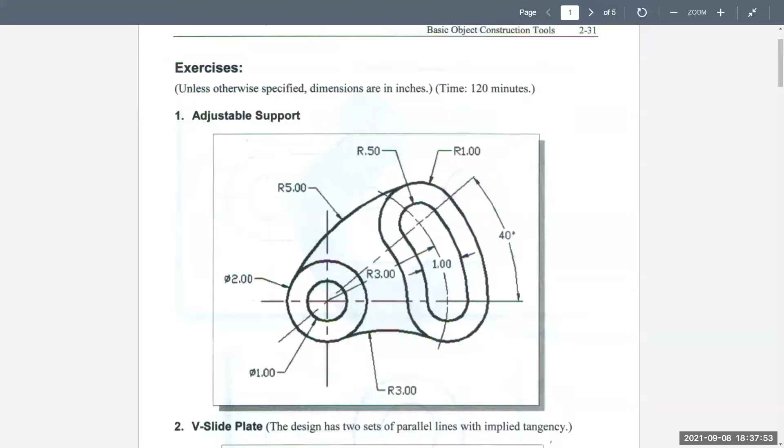All right, so I'm going to go ahead and do the adjustable support. And so the first thing I want to do when I look at this is notice that it says dimensions are in inches unless otherwise specified. So I can see here that everything is in inches.

And so whenever I start, I always try to figure out where is my 0, 0 going to be, right? So I notice that everything is based off of this point right here, this circle. For example, there's a radius here that's one, and so everything is off that. So I think the best thing to do then is to start here.

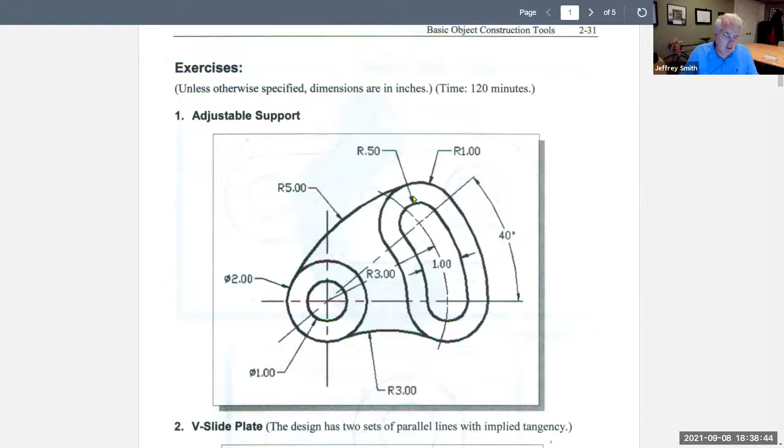And I think the first thing I'll do is just make 2 circles. And then I'll just make these circles and then I'll trim them. So that's probably the fastest way to do it. And then I noticed that there are these larger circles, and that's typically done with a tangent radius. So let's make that happen.

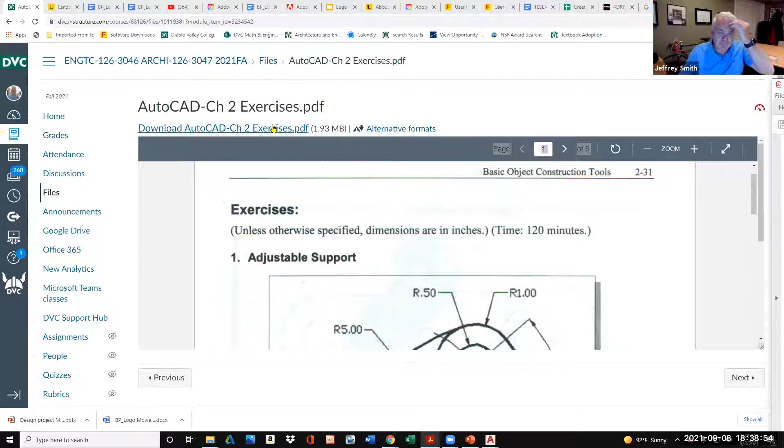All right, so I'm going to just probably download this, put this on the side so I can refer to it. All right, so I got this here, and then let me get my AutoCAD open. All right, so I'm good to go. So there's my PDF right there. And so again, let's go ahead and I'm going to model this.

So first thing I want to do is make a diameter of 1 inch and then a diameter of 2 inches. So make sure that I've got my settings straight up here. So I'll come and my snap settings. I'll have my polar tracking on and my object snap. Midpoint is very helpful, and this extension is very helpful too. And I'm good to go here.

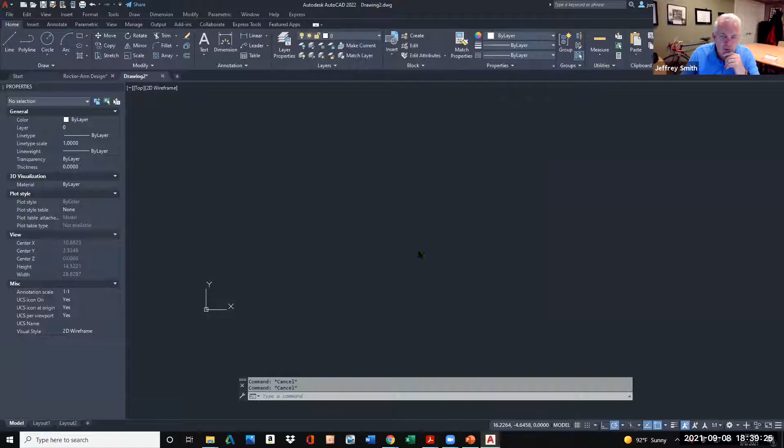So since it's giving me the diameter, I'll just go center diameter, and first point is my 0, 0, my center. So I'll type in 0, 0, enter. And then we said the first diameter is 1. So I'll just type in 1 and enter. So the reality is I don't really know the scale here. So I usually have my cube here, and I'll center it.

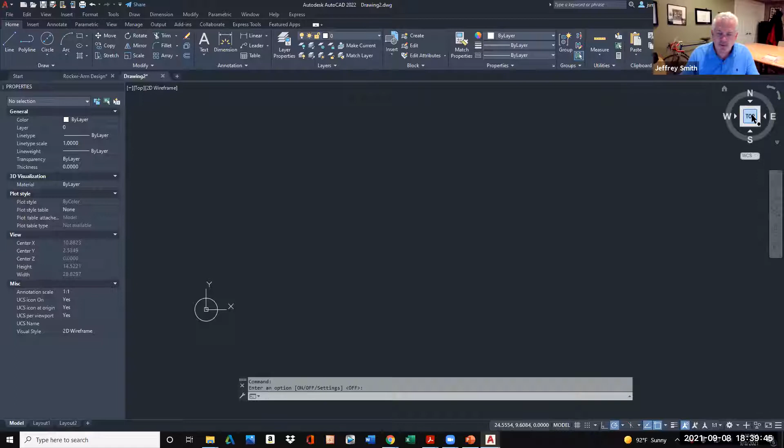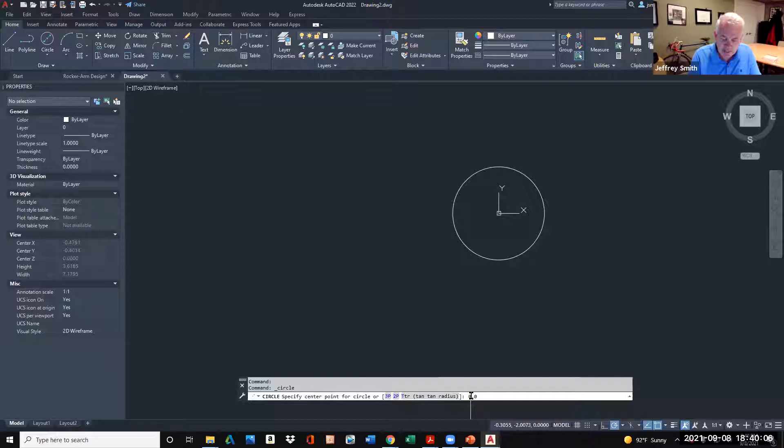And then just for kicks here, let's do the other one, and then I'll do my dimension center. So I'll do center diameter, and we said the second one was 2 inches diameter. So again, I could just snap to the center here. I don't advise it because it might be off a little bit and you don't realize it. So then I'll type in 2 and push enter. And so again, I'm doing this portion of it right here. So let's just zoom out a little bit.

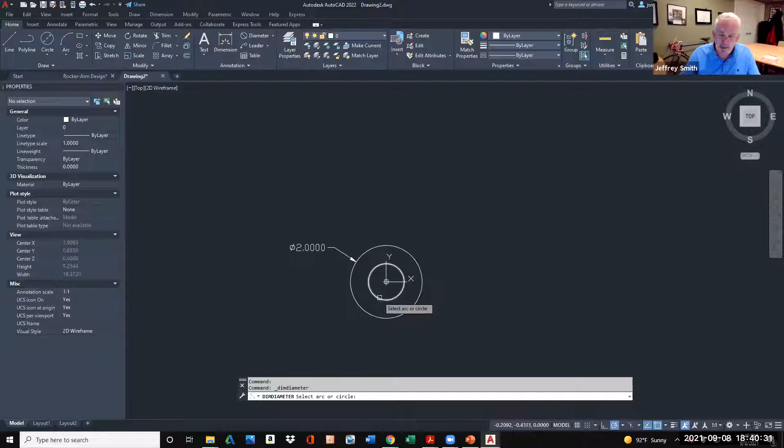Let's go ahead and dimension this. So I'll go to linear and I'll go to diameter. And so I'll do this one first. That's 2. And then the other one, we'll do the same thing, diameter. I can always just push enter on my keyboard and I'll do this. All right. So maybe it's a good idea just to get the settings done early on here. So the precision is at 0.00, so hundredths.

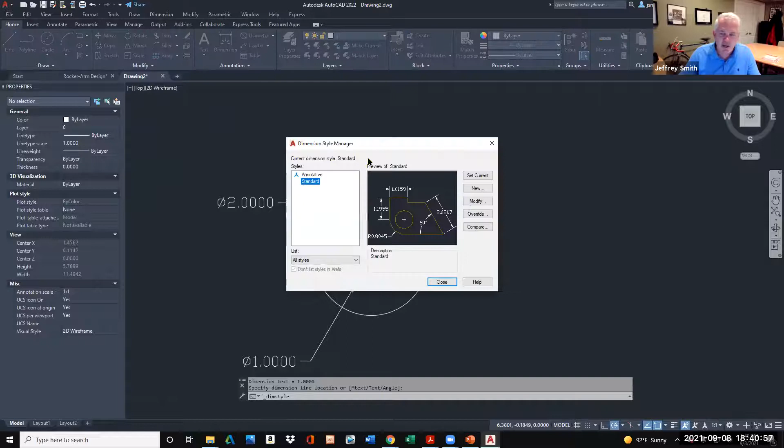So the easiest way to do that then is I'll just do that right now so I don't have to deal with that later. So I'll go up here, make sure that I've got my show menu bar. So I'll click show menu bar. Let's go ahead then into our format, dimension style, modify, and then I'll find the precision on here, and I'll change that to 0.00 and say okay, close, and there it is. All right. So so far so good.

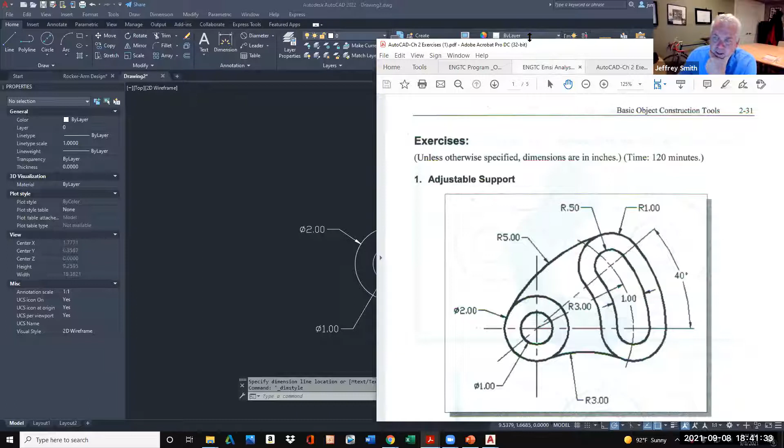Now let's go ahead and let's make this. There's some circles here. I know that this one is 3 inches. It doesn't say what this is, but I can deduce that if that's 3 inches, that's going to be 2.5 because that's half of that. So I'll just go ahead and make the, you want to go with what it gives you. So I'll go ahead and do that. So I'll go ahead and make a diameter, or actually I'll do a radius that's 3 inches because that's what it's giving me. Obviously diameter 6, but that's okay.

So I'll go circle and I'll say radius. And I'll type in 0, 0, that's my center. And then it wants to know the radius, and it's at 3. So I'll do that, right? So it actually is a center line. So I could do that. I'll do that later just for the sake of argument here.

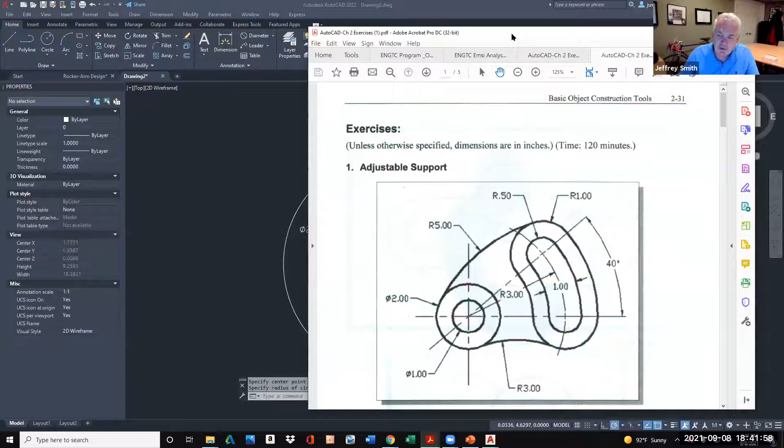So we said the first one was going to be 3. It's going to be 2.5, enter. And then I can push enter on my keyboard since I'm already there. I'll go ahead and type in 3.5. Let's do that again, enter. Center is 0, 0. And then I'll type in 3.5. All right, so there we go.

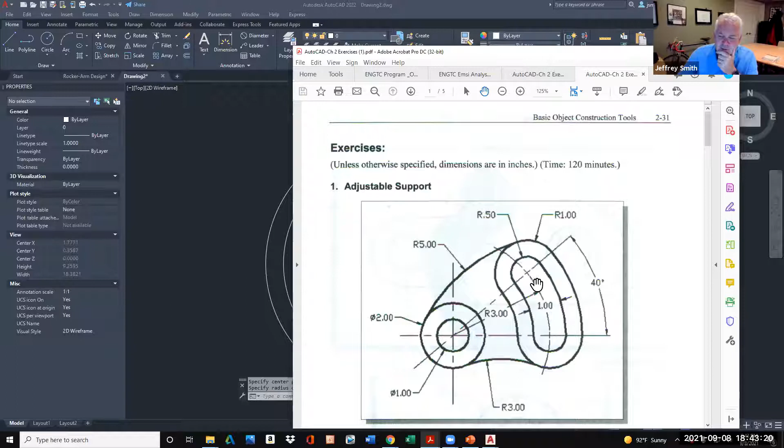So let's go ahead and make a line. I'm just going to type a line, type in 0,0, and probably the quickest way to do it on this line tool - type in 0,0, enter, and then just make a horizontal line. I'm not going to worry that much about it since it's horizontal - I could just type in 5, enter, and then escape.

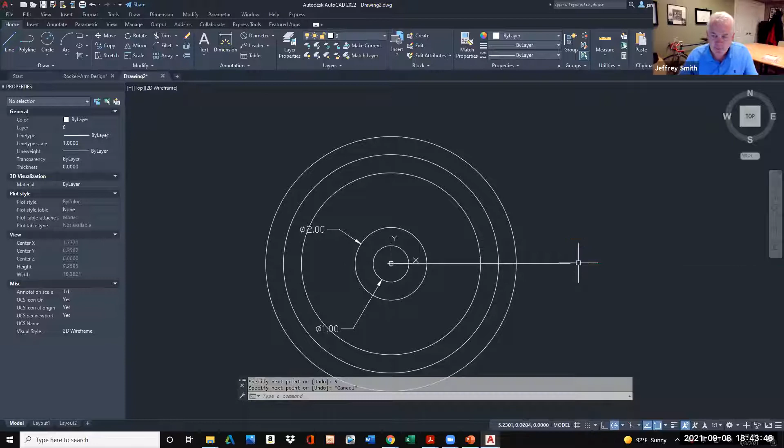Now what I'm going to do is rotate that. So I'll type in rotate, enter, and select what I want to rotate - that line. The base point is going to be 0,0. And then the rotation angle, it's kind of weird, it goes opposite, so I'll type in 40, and there we go.

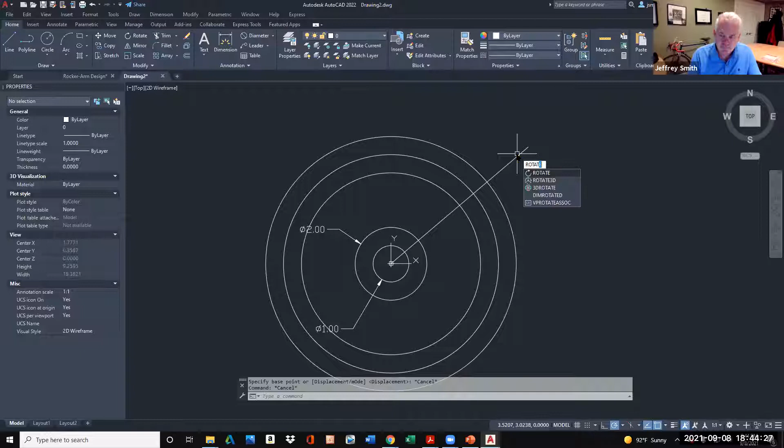Maybe not a bad idea - I'm going to do something kind of tricky here. I'm going to say copy, enter, select the object. Actually, let's do this: I'll type in rotate, enter, select the object, enter. Base point we said was 0,0, enter. I'm going to copy it, so I'll hit copy, and then I'll type in -40, enter.

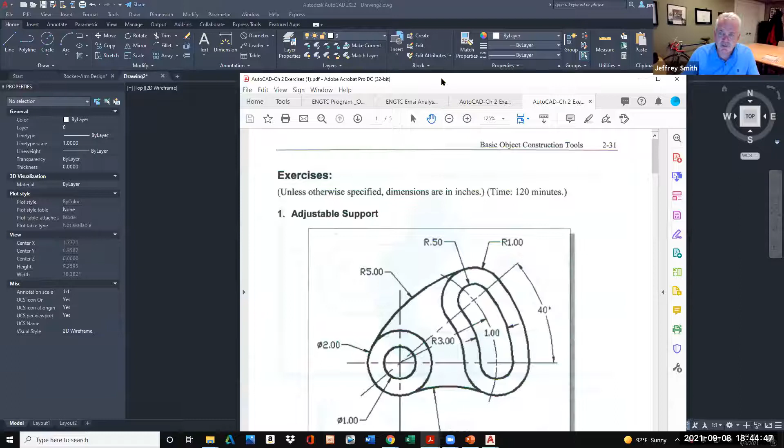All right, so to verify that's 40 degrees, because I've got this here in my book and it says 40 degrees, I'm going to go ahead and verify that dimension. So let's go to angle, and I'll select it, select the other one, and there's 40 degrees. All right, so that's good.

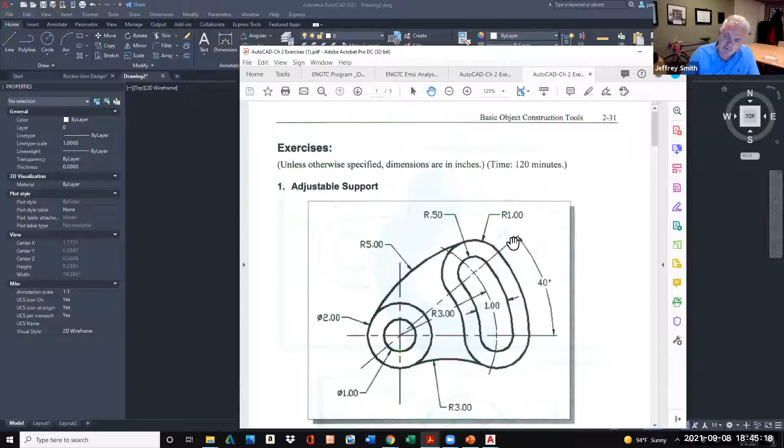So you'll see what we're doing here - that helps me because at that intersection, I've got a circle that has a radius of half inch, right? So at the intersection of that 3 inch radius and this 40 degrees, I've got 2 circles here. So that's very helpful.

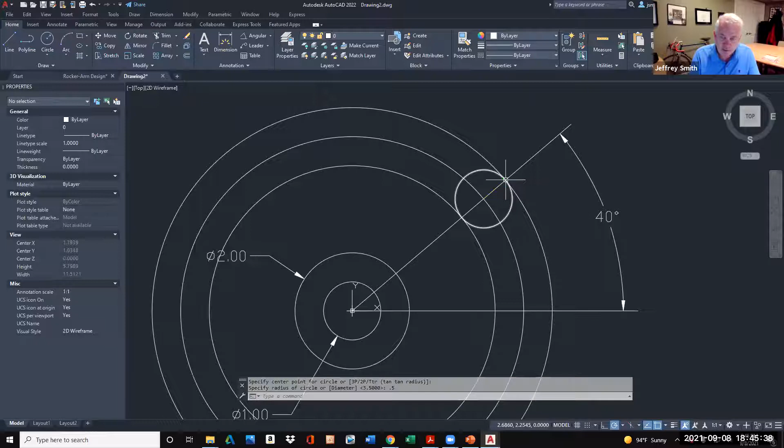So what that tells me is I just take my circle tool, radius, and I can snap on that intersection, and I should be able to go right to that intersection if that is truly half inch, or I can just type in 0.5, and there it is, right? And I'll do another one down here - just circle, radius, and I don't really have to type it in, I can just snap there and it's telling me, all right.

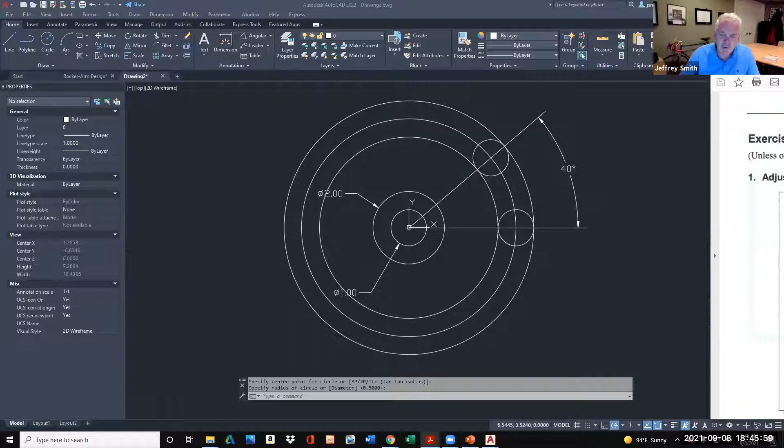So far, so good. So what the heck, all these lines, what are we doing here? I don't need the other lines, so I can actually trim those lines away. So watch what I do - of course, all I have to do is type in trim.

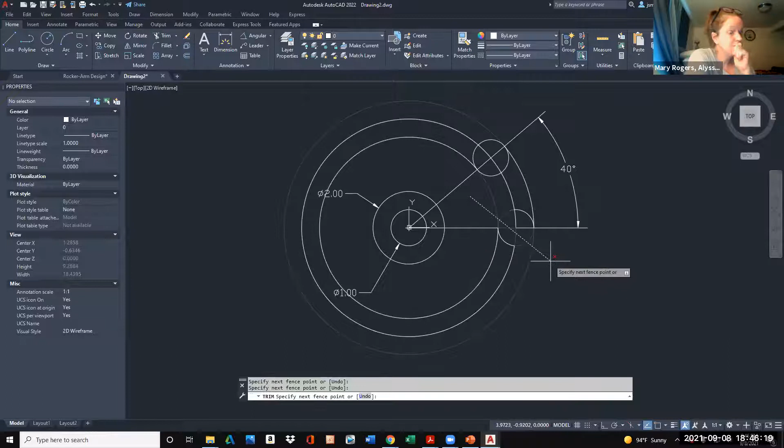And I'm going to basically select everything. I hate it when it does this - try that again, Control Z, trim, enter. Let's see, let's go down. I don't like when it does it like this. There, all right, that's what I wanted. Okay, that's a new feature - I think that's what I wanted.

That's good, all right. So other thing I might want to do while I'm here is, if you notice on the PDF drawing, this is a center line - I can tell because it's a long line, and then there's a little line, so that's a center line.

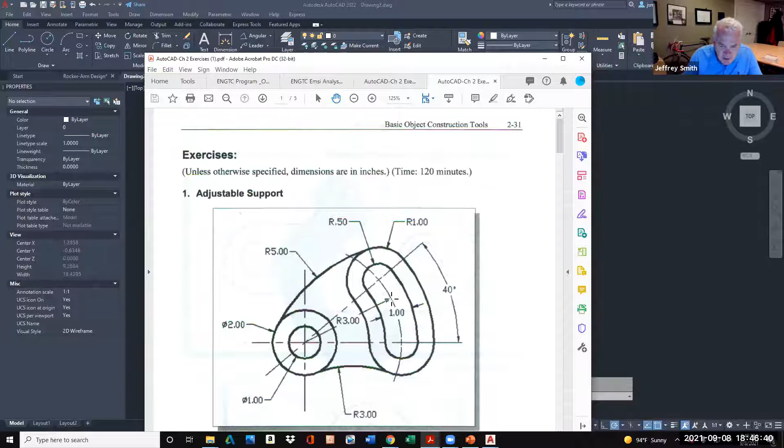So what I can do is go here, and on the line type - let's see, line type by layer. Let's see, how do I do this again? My apologies, give me one second here. I'm going to go to line type, give me one second. Okay, so line type, it doesn't show anything, so what I need to do is load it in here.

I don't know why they don't have them all in here. Essentially I want to go to center. So what you'll find out, if you don't see it, you've probably picked one that's too big. I'll just do the default one, and I'll say okay.

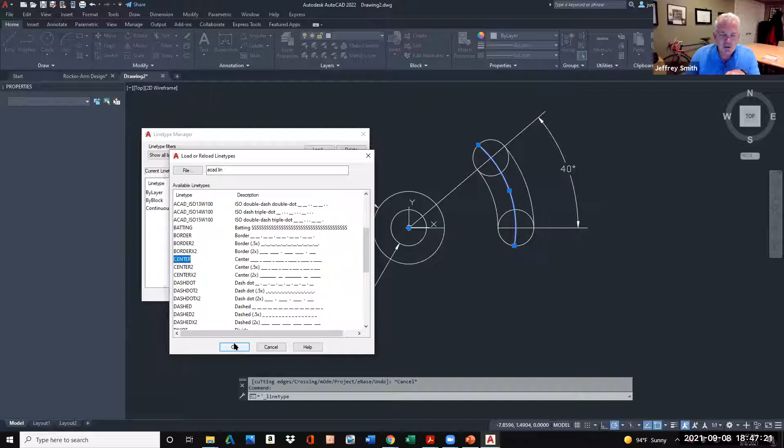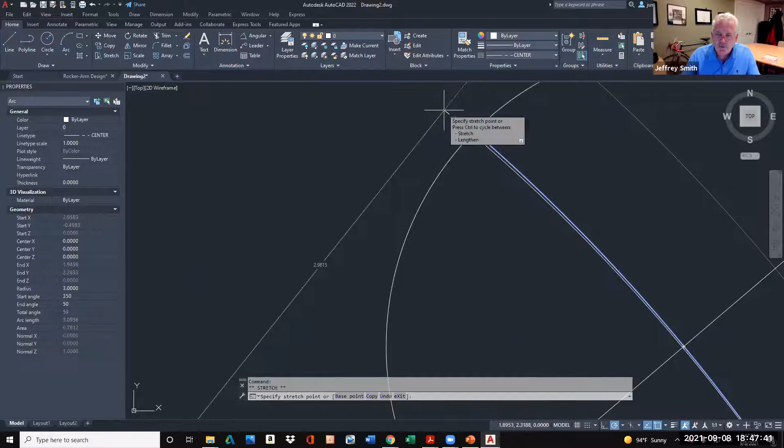Then I'll select this line, and I'll come over here to line. I'll click center, and you can see there's a center line, right? So if I wanted it, the other thing I'd want to do is extend this beyond. Believe it or not, if I zoom in here, you'll see it actually will, on that green line.

If I stay on there, it'll project out onto it. So I can do that. Again, what I'm doing is I'm selecting the end of it, and then there's a little green line. It actually wants to stay on that radius, and I can extend it out.

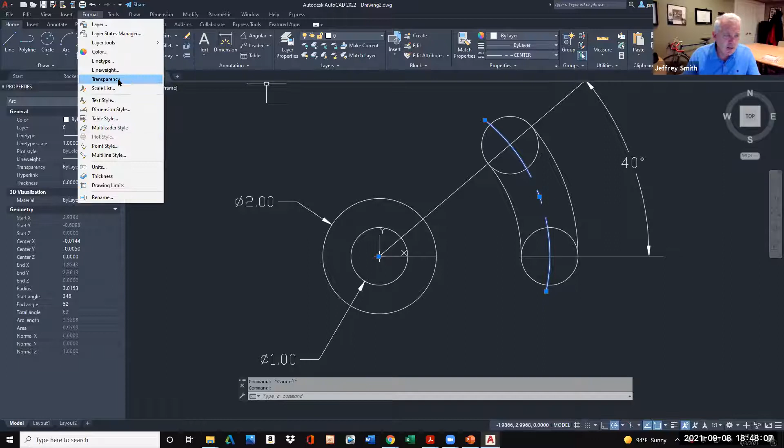So if that doesn't feel right, what I did was I went to format, and I went to line type, and let's make a smaller one. So I'll load. Let's try the one that's a little smaller. So center line, I'll go 0.5, and I'll say okay. And so there it is.

What I'll do then is I'll select here, select the line, go to my properties. I'd right click and hit properties. Then I could go ahead and say center 2, and you'll notice it's a little smaller.

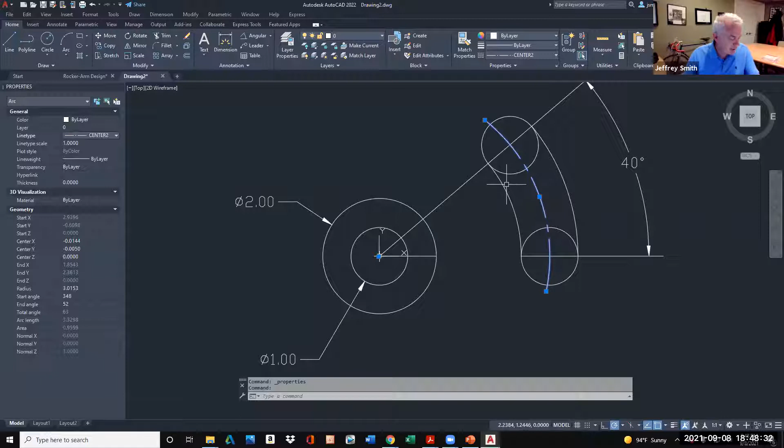Now there's a couple more I need to trim, and I'll be using the trim a lot. So I need to trim the other part of that circle in here. Let's go ahead and type in trim. I don't like the way it's doing it now, but let's just do the best we can. Trim, enter. I will just select this, and I can just delete what I don't want.

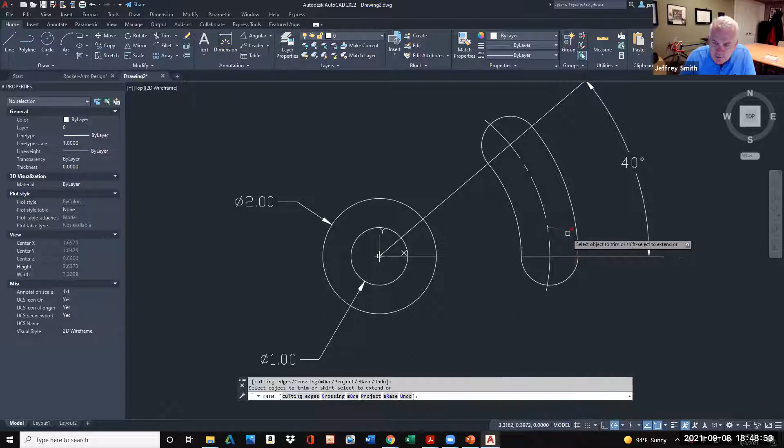So if we're looking at what we're doing here, it actually looks pretty good. I do probably want to go ahead and extend this line, because that's going to be there. That's also a center line right there that it's working from, both of these actually. So let's take this, snap that to the center.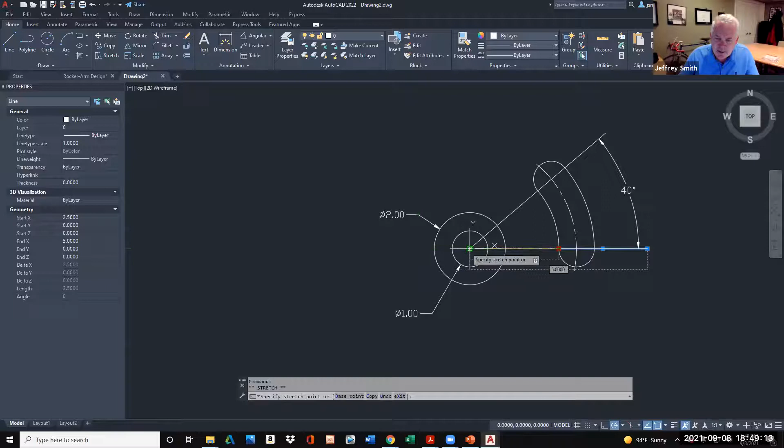I'll select both these lines. I'll go to line type, and I'll go to center 2, and I've got multiple lines here. So let's delete one of them. Let's see what we got here. I can fix that later.

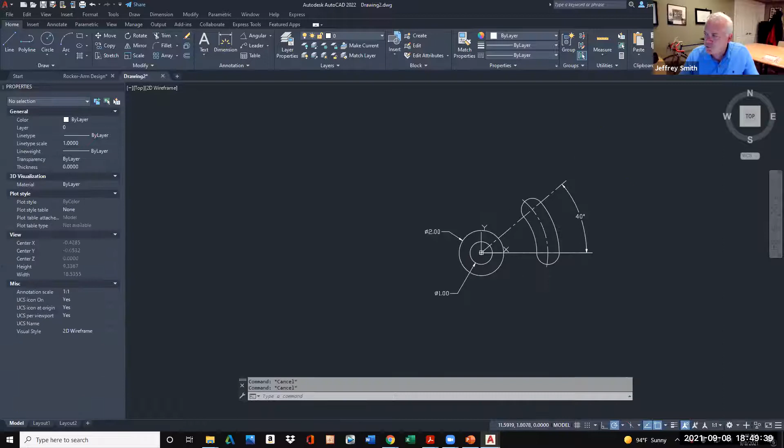All right, let's just keep plugging through this thing. Now what I want to do is go ahead and make these other circles, and then I'll make these tangent circles. So this circle here on the outside, then the radius is going to be, if that says that's a half an inch, so that one was 3.

So this one's going to be 3 minus 1 is 2, and this one's going to be 4. So let's just do that.

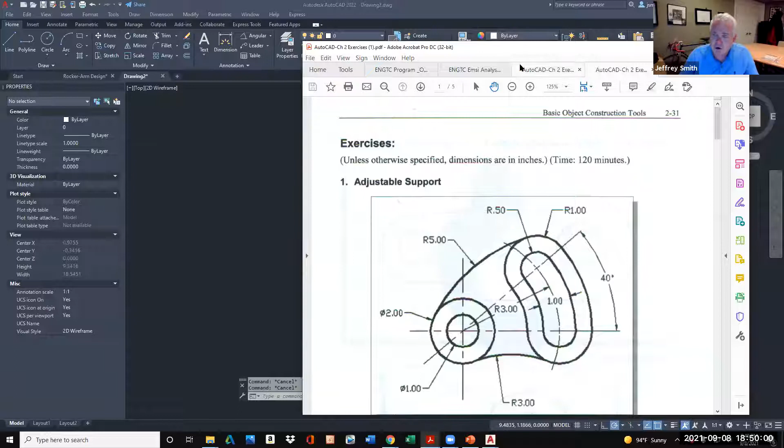So I'll go here and say circle, circle radius. Is that circle radius or diameter radius? I'm following the PDF. So let's go circle radius, radius, center 0, 0. And then we said that it was 3 minus 1 is 2.

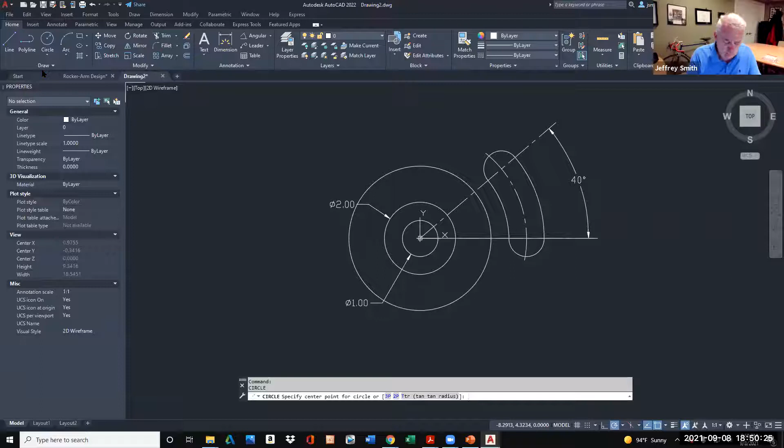Enter, and I'll push enter again. That'll have the same command. I'll type in 0, 0, enter. And this one is 4, enter. So that's what that's all about.

Now I've got to figure out how I make this. So again, I have a circle that's at the center of this intersection, and it says the radius is 1 inch. So what I'll do then is I'll go to the

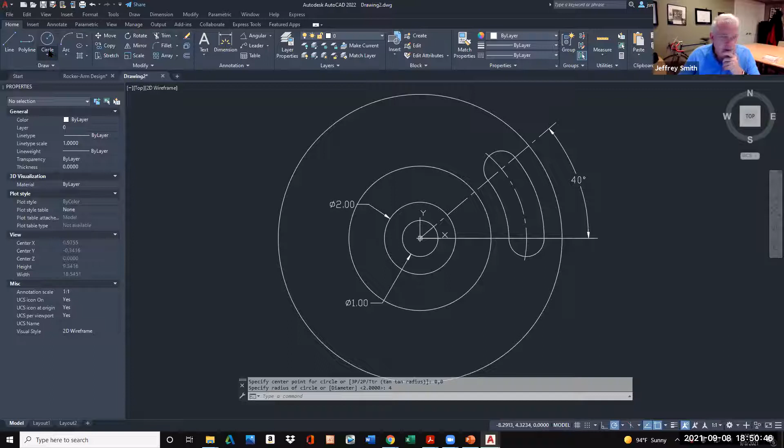circle radius, and I'll do that intersection. And it looks like it's a little off, 0.999, that's so close. Let's just type in 1. All right, and then I'll do the same thing down here.

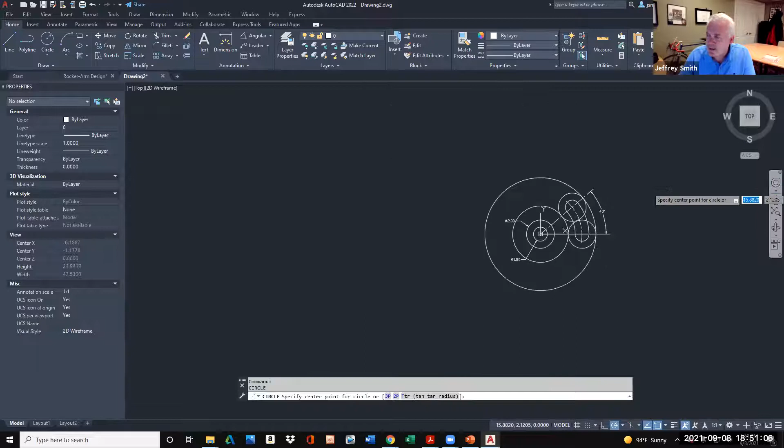1, enter. And so again, now I'm trying to copy this. That doesn't look right, or does it? Is that right? I guess it is. So let's trim this and see what we have.

Excuse me, so I'll type in trim, enter. I want to trim, let's do that again. So let's zoom in here. You really have to be looking at your drawing as you're doing this.

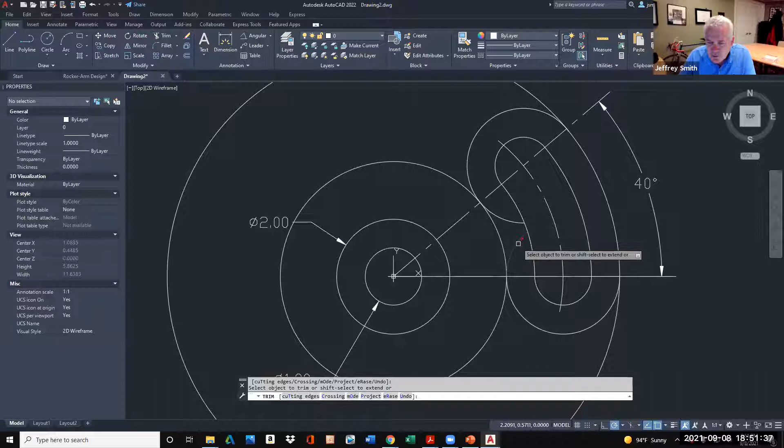So I don't want this line. I don't want this line, this line, this line. So you really want to be referring to your drawing. I don't want that line. So let's look at the PDF again and just double check that we're doing this right. So help me, PDF, I don't want this line.

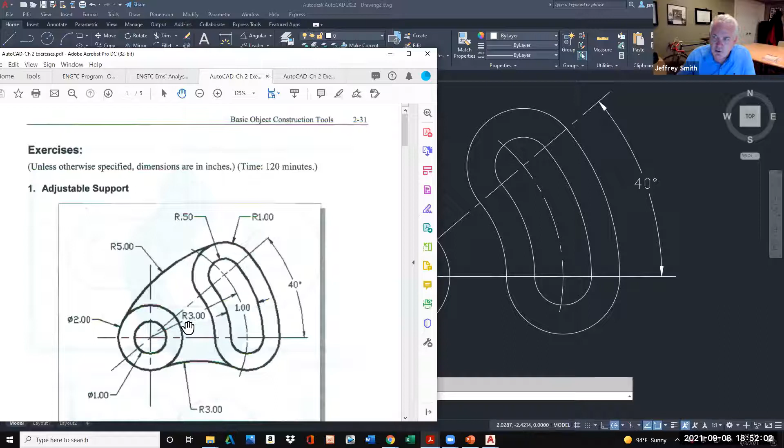All right, let's look at the PDF again. So there's my PDF. I need to add these lines, and these are kind of weird lines. Forgive me if I don't get it right the first time, but what we want to do is go to an arc.

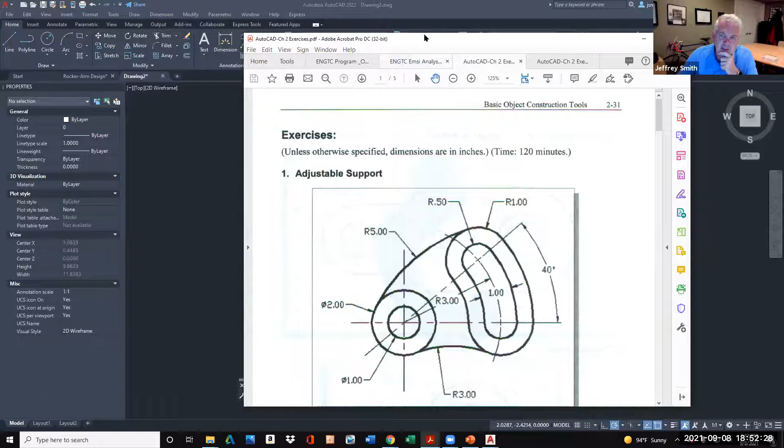I can do circle tangent, tangent, radius. If you look here, it tells me the radius of this is 5, and tangent means it's coming right onto that line. It is on that line. So I'll go circle, tangent, tangent, radius, specify first point.

I'll select this line, select second line is this one. And then it said the radius was 5. Type in 5, and there it is. So what I've done is created this radius of 5 inches that's tangent to these circles.

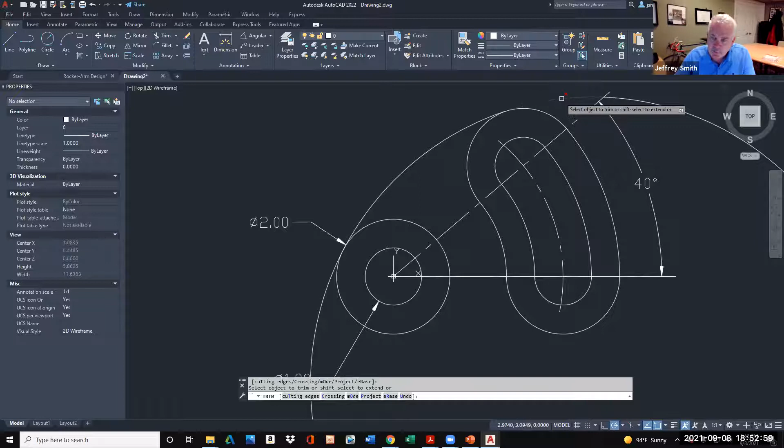So what I would do then is type in trim, and I would go ahead. Let's do it in here. Trim, enter, get rid of that and get rid of that. All right, wrong one. That's what I've done here.

Now I want to do the bottom one. It's tangent, tangent, radius is 3. Now this is a little different because sometimes when you do it, it goes the opposite way, and I think that depends where your mouse is. We'll go here, circle, tangent, tangent, radius, and I'll select this one and this one. This one, radius is 3, enter. If your mouse is below it, let's try another one.

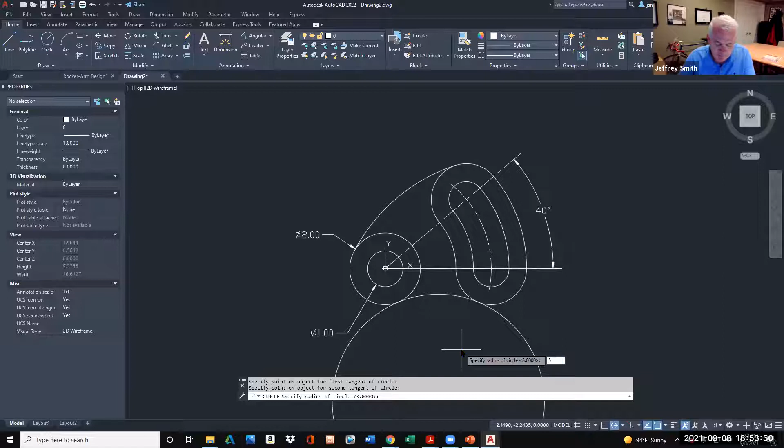We'll go enter, and I'll go tangent. Let's do another one. Specify, let's go tangent, tangent, radius. I'm trying to do it wrong, which is silly of me. This time I'll have my mouse on the bottom. Let's see if it does it. I'll type in like 3. Let's see what happens. Yeah, see how that way it went the other way. So it depends where your mouse is — if your mouse is above the line, it'll go above.

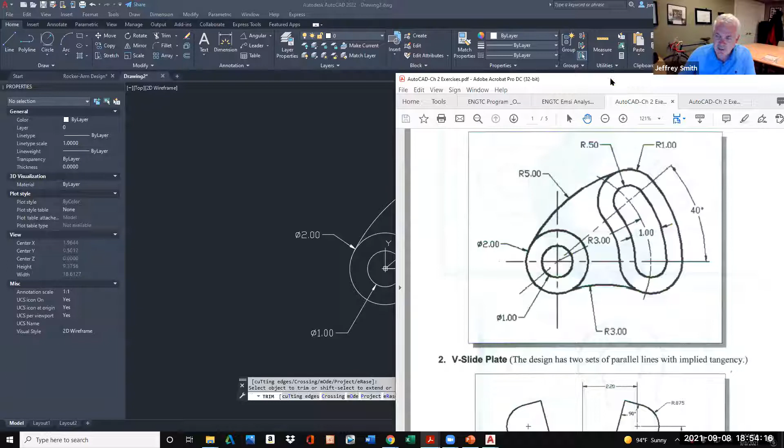All right, so now I'll type in trim, and I'll get rid of this. So far so good. Let's constantly refer back to this. To verify what I'm doing, I noticed I need to actually extend that beyond, so I'll fix that real quick. I'll select this line. Oh, bad. All right, trim — I needed to hit escape. All right, enter and hit escape.

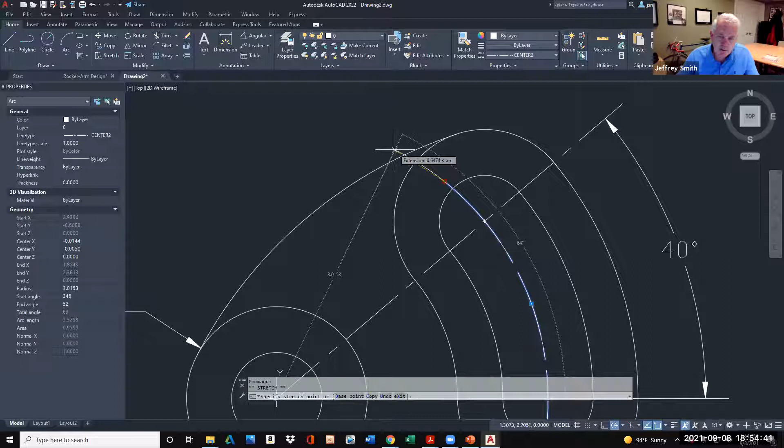So then I want to extend this on. If you just drag it, you'll notice there's a green line — it should go, sometimes you got to baby it, you got to be really careful. All right, extension — so you can kind of see what we're doing. You'll see a green line, and I control that with my snap settings, the polar tracking, and the extension. That's where you control these features.

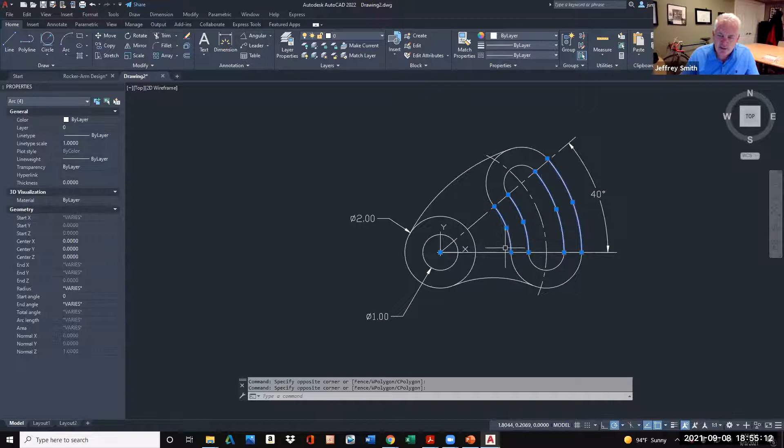All right, I think I'm in pretty good shape here. Let's go ahead and thicken these lines, then I'll add the dimensions. To thicken these lines, I select the lines I want, and I can do it like this. I just have to be careful not to select the center lines or the dimensions — that's why I'm doing this now before I get all the dimensions in there.

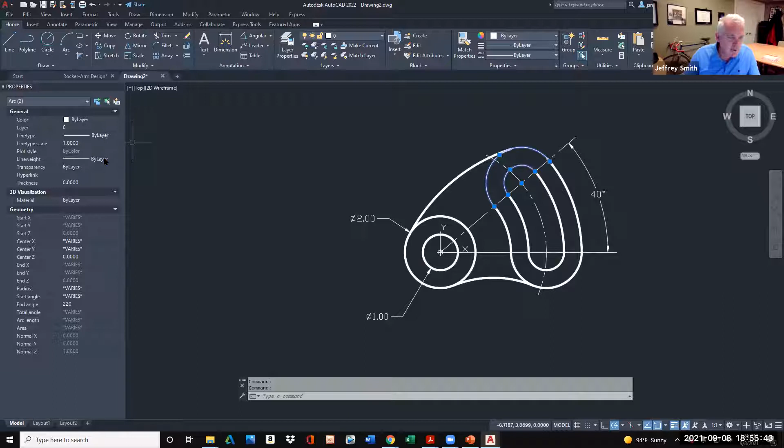Then I'll go ahead to my line weight, and you just have to exaggerate it. I'm going to go 0.5. If you don't see it, it's probably because you have your show line weight turned off. It's good that I had it, because now I see there are some other ones I missed. Again, line weight, and I'll go 0.5. All right, so far so good.

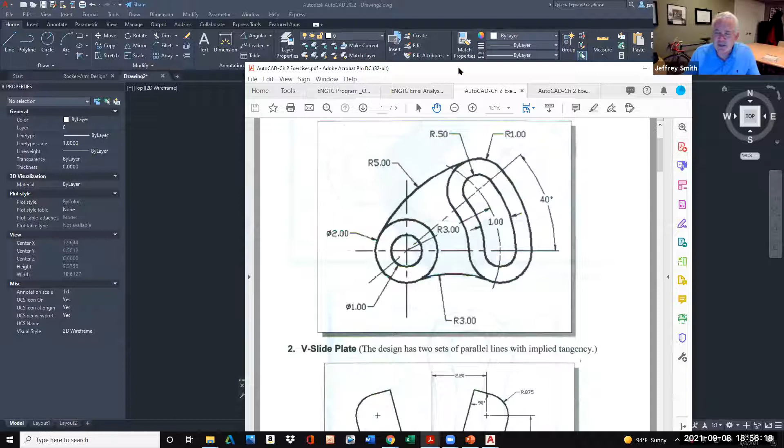Just double checking — I think I'm rocking here. Let's go ahead and put all the dimensions on here. I want to get these; these are all radiuses. Just so you know, if it's a full circle, the rule is to dimension it as a diameter. If it's a radius, you don't dimension it as a diameter — obviously you do it as a radius. It may be obvious, but it's telling the viewer this is not a full circle. It might be obvious, but sometimes you can't tell because there's so much information, so that's why we're dimensioning it like this.

So I'll go here to my radius tool, and I'm just going to try to copy what the textbook does. I can just push enter — that'll do the last command, you don't have to do it every single time. I'll push enter again and do this one. All right, I think we're doing a good job. I'll do the bottom one.

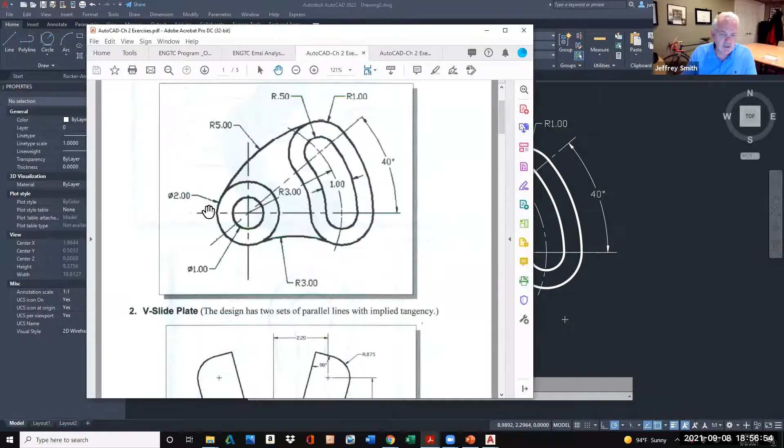And so I know that that center line, that the bottom is the same, because that's what it's telling me. Just looking at my PDF, I think I have most of these lines here. Now I do want to have this center line here. So a way to just do that really quickly here, because I know that people get very annoyed: I could just type in 0,0, enter, and then come up above the part.

Didn't do a good job here. Let's do that again. All right. I'll just type in 2.5, enter. I can push enter again, or I can just grab this thing because I'm lazy and just come straight down with it. Another 2 inches. All right. And then what I'll do is I'll select this line. We already have a center line here. So I'll say line type. We already decided it was center. So there it is.

And then we can do another one here. I don't know why this isn't, but let's go ahead and make another line here. So what I might want to do is kick this back a little bit. So let's go ahead and make another line. I'll type in 0,0, enter, and I'll come here. Let's go maybe 1.5 inches, and then I'll push enter, and I'll do another one. So I'll push enter, 0,0, enter, and then I'll go back here. We'll just stop right there.

And then I think what I'm going to do is take this, kick this back. Let's do this right. All right. If you click on the line and then you hold shift and click on the dimension of the angle part, you'll just have the line selected, I think. Okay, thank you. So let me go here and line, we said line type. And so line type, and I'll go center here. Just these little things actually are really important.

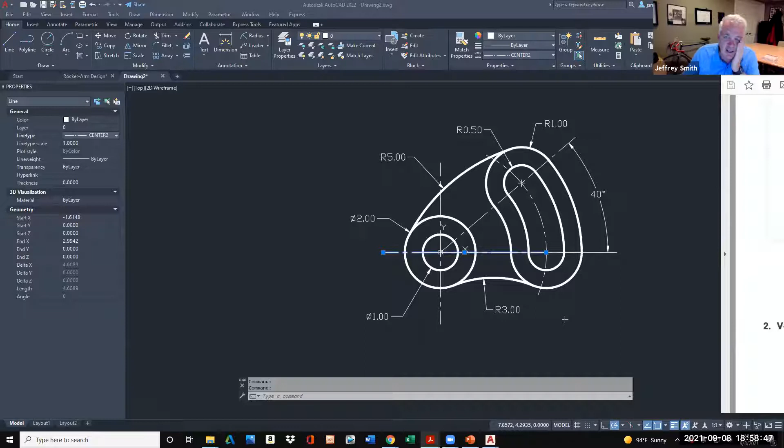And now there's other things we want to do, and you guys are going to help me because I always mess this up. So I could manually do this, but I think there's a way that you guys showed me, where I select this and I come down here, and for the text, because if you notice the PDF is radius .5, not 0.5. I remember one of you were showing me last week, I could manually override it just by typing it in. But the problem with that is that if I would change that radius later, it does not change.

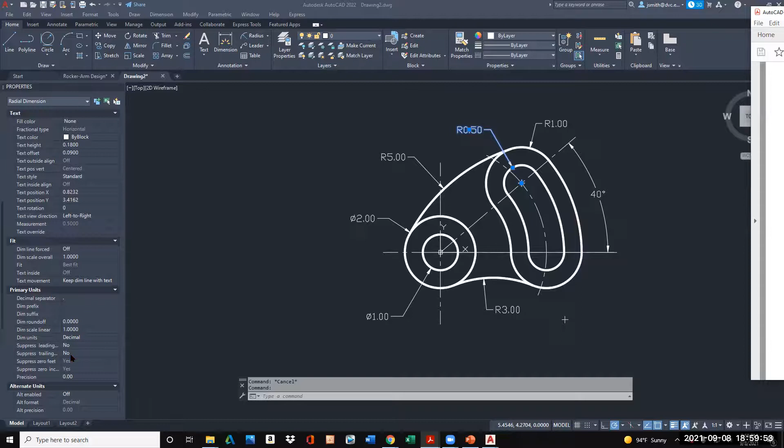So it's going to be the suppress zero override in the dimension style. Is it over here? Dimension style, suppress 0. All right, so bear with me here. Dimension style, my apologies, I think I just passed it. Yeah, there you go. Right under primary units, suppress 0. Is this where it is? You got the suppress leading. It says right now no. We want to make that yes. Correct. There you go. Cool. Awesome. Thank you.

All these great tricks. So the other way I could have done it is you can manually just double click and change what's in there. I don't recommend it because if you end up changing the radius in the future, you don't see it. For your class you'd be fine, but when you're working by yourself, you can really screw yourself up. You can also do manual overrides here, where you can text override. You can type in R.5. I don't recommend doing that, but just so you know, you can do it. Obviously, the way that we just did it is by far better. Okay, so I think we're good here.

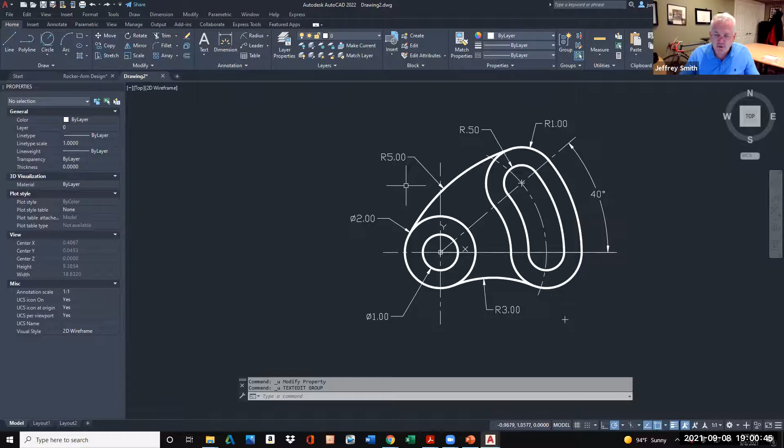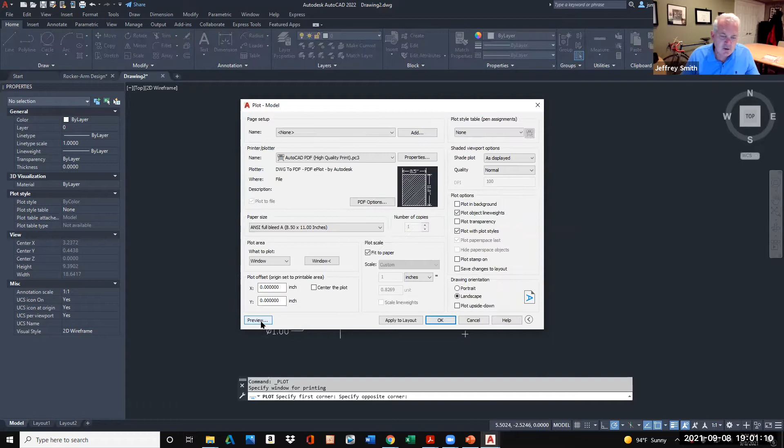So what I would do then for my class is I would save it, and then just to make sure, you don't technically in AutoCAD print, but you plot. So you could type in Control P, and then we'd want to go here to our AutoCAD high quality. We're not scaling this. We'll learn about scale some other time. We just do to fit, and I'll go window, and I just want to make sure that all the line weights and everything are doing what we think they're doing, and voila, that looks magnifique.

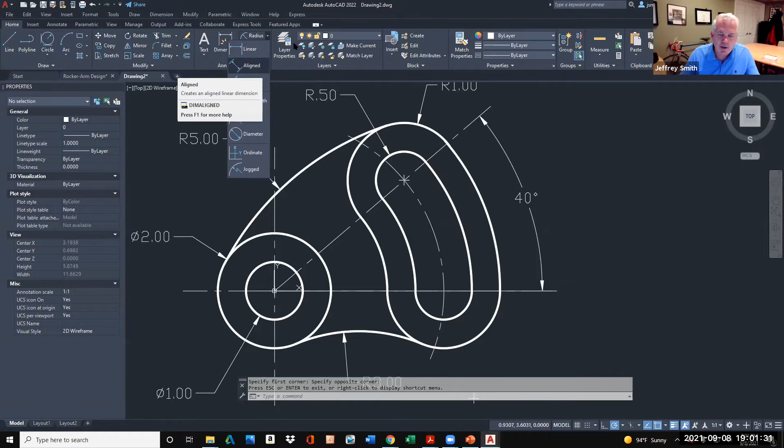Oh, I did miss a couple of dimensions here. So I missed this radius here, and I missed that dimension. So there's a couple of other things I want to do. I know I'm going to fight this for a little bit. So on some of these, you've got some other ways to do it. But I think for the most part, we're good here.